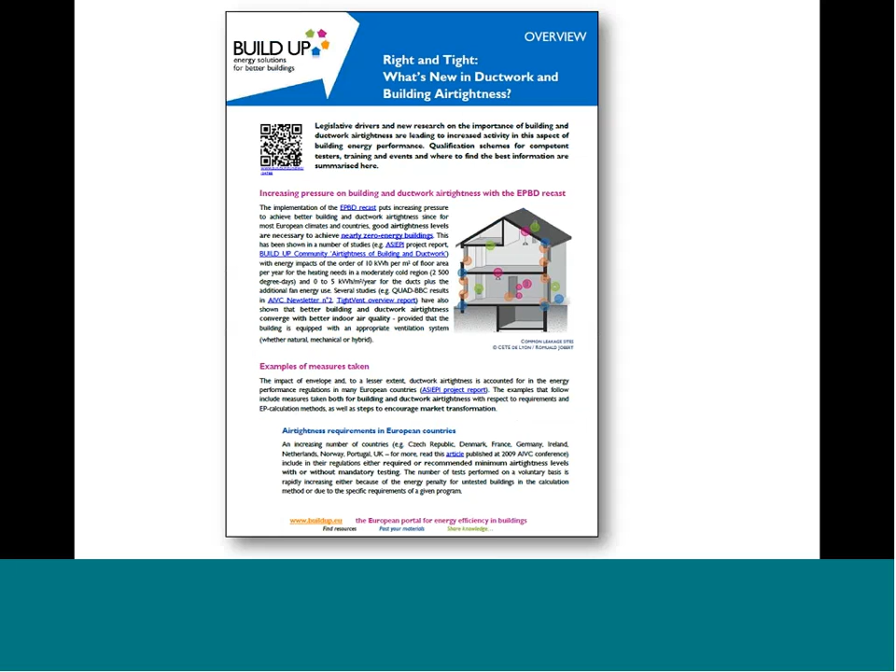And there is, of course, BUILD UP, mentioned previously by Garcia and Peter Wouters. In fact, my presentation and the one that Valérie Leprince will give in a few minutes are closely linked to the overview article which you can see on the screen now, and which you can download from the BUILD UP website.

So my presentation will be divided into a few sections. The first chapter will be about increasing pressure on building and ductwork airtightness with the EPBD recast. Then we'll talk about the requirements in EU countries, and about the incentives through calculation procedures and subsidies. And then we'll try to draw some conclusions and perspectives.

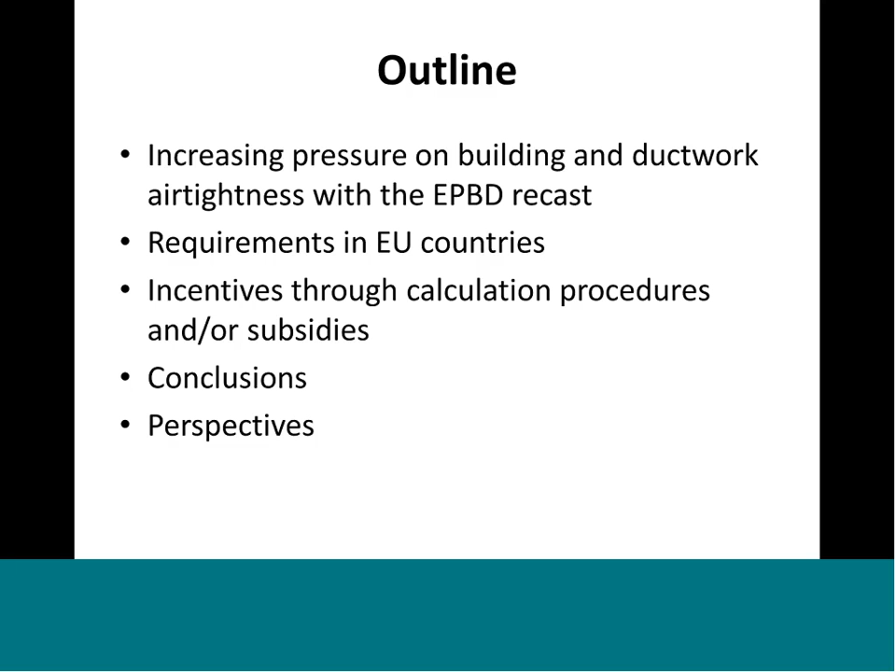So with regard to the pressure on building and ductwork airtightness with the EPBD recast, there are several sources that report an energy impact on the order of 10 kilowatt-hours per square meter per year of floor area for the heating needs in a moderately cold climate. That's for the envelope leakage, and about 0 to 5 kilowatt-hours per square meter per year for the ducts, plus the additional fan energy use. This has been reported in the past, and you can find some information about that in the ASIEPI reports, which have been funded by the Intelligent Energy Europe program.

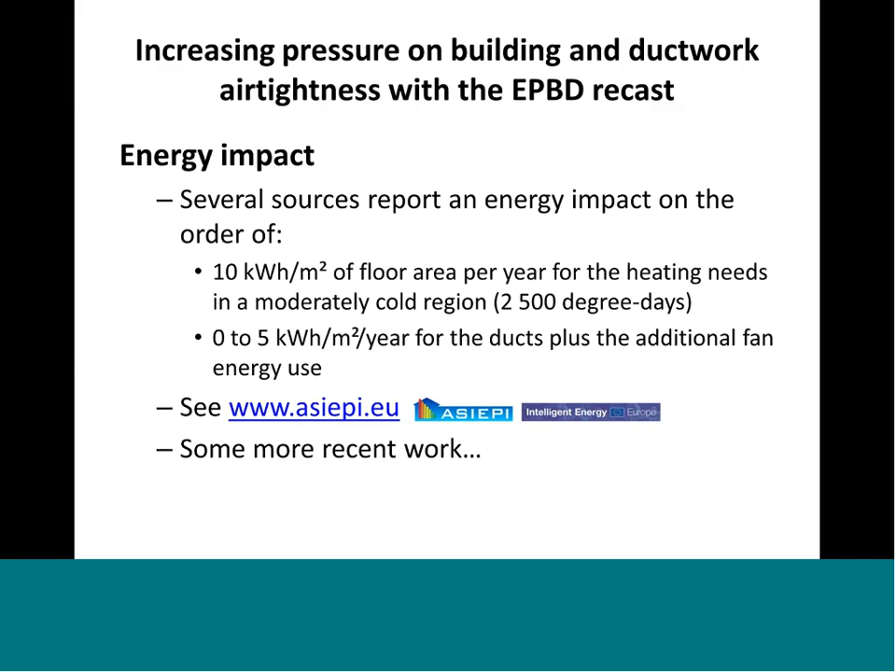But there's also some more recent work on these aspects, and I would like to focus on three studies which are more recent, which I thought were interesting to mention during this webinar. The first one is a study conducted in the UK, where they looked at two similar dwellings in two phases. In the first phase, the two dwellings had about the same leakage and tightness, and in the second phase, the airtightness of the second house has been improved significantly, as you can see here.

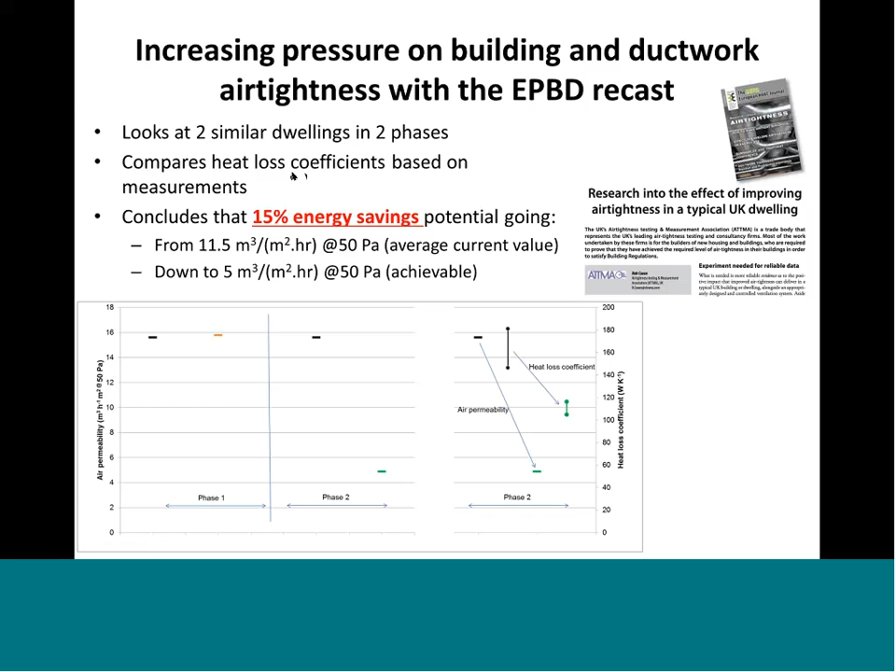They also measured the heat loss coefficient in the two phases, and showed that with the decrease of the air permeability, they also saw a significant decrease of the heat loss coefficient. I thought that was very interesting because this is based on experiments. Most of the time we have results on the impact of air permeability based on simulations, but in this case it's based on experiments, which I thought was quite interesting to mention. They conclude based on that that 15% energy savings are achievable in the UK building stock.

Second interesting study was conducted in Spain on office buildings in Madrid. I thought that was interesting to mention because we very often mention envelope and ductwork airtightness for cold climates or for mild climates, but it's also a concern for hot and mild climates. You can download that study from the REHVA website—it was a special issue of the REHVA journal in January 2013.

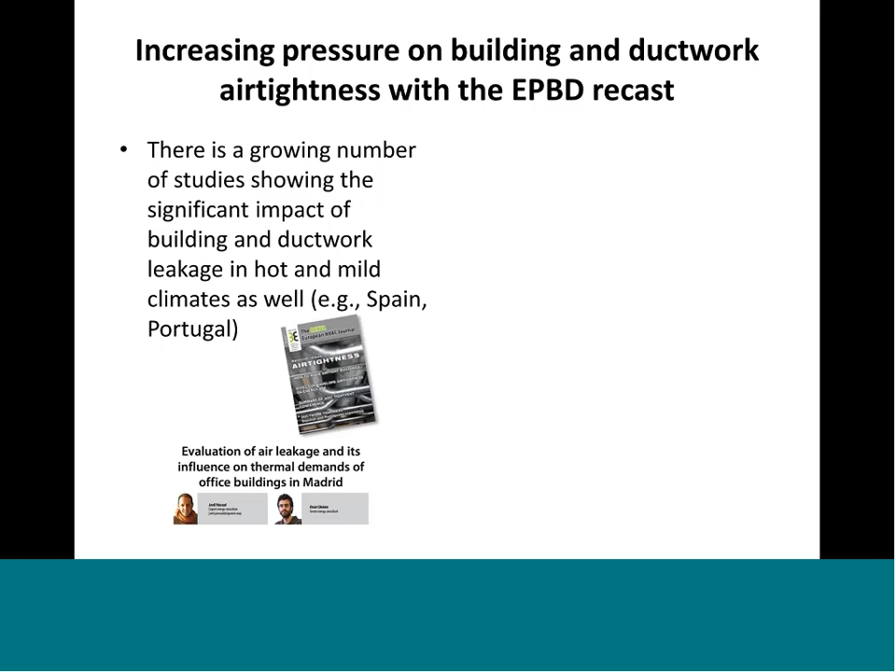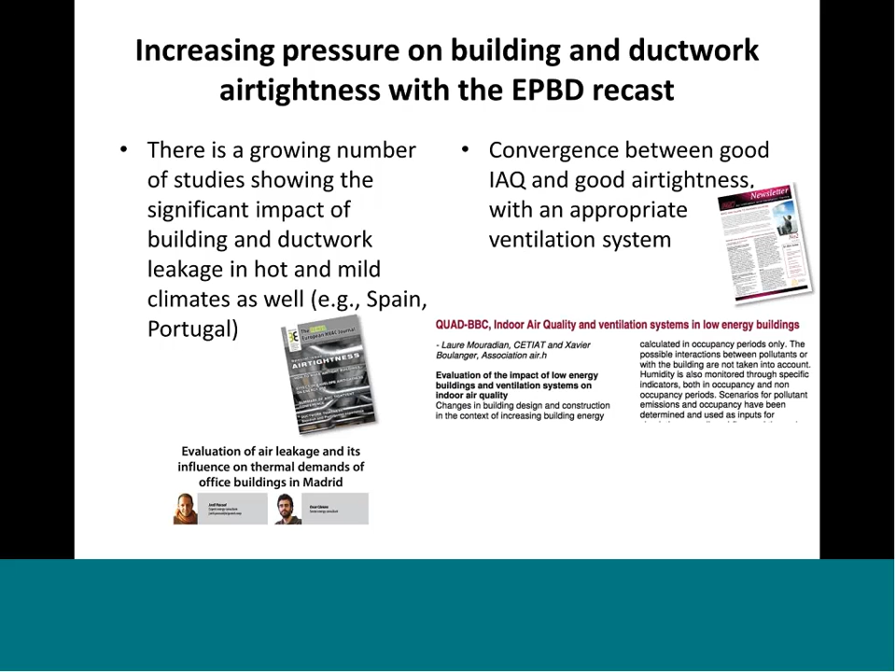Finally, there's a study conducted in France that showed a good convergence between indoor air quality and good envelope air tightness, provided of course that you have an appropriate ventilation system. You can find information about that in the AIVC newsletter. There was an article, I think in the second issue of the AIVC newsletter, showing that improving building air tightness was actually converging with better indoor air quality in the test cases they looked at.

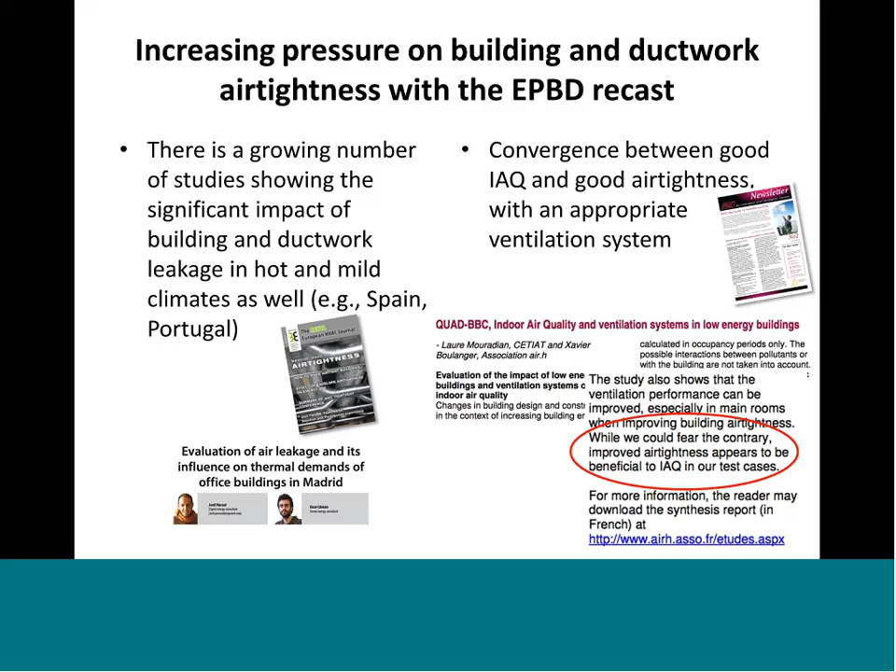So all of this shows that it's actually relevant to put pressure on building and ductwork air tightness in the context of the EPBD, because obviously it has a big impact on energy consumption. And of course, if you want to go to nearly zero energy buildings, you have to pay attention to these aspects.

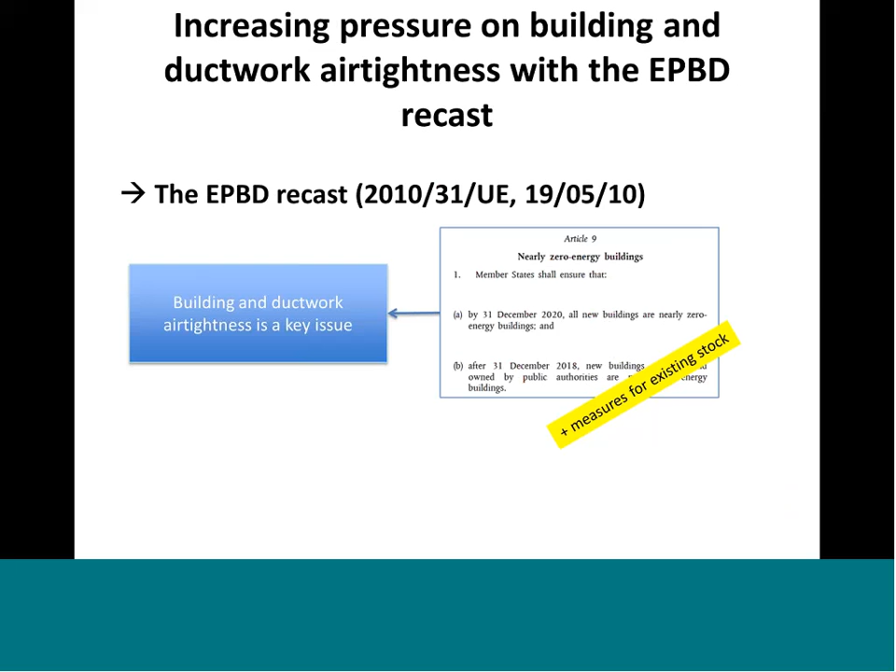Also, we see that in this context, requirements evolve. Although there is no explicit requirement for air tightness in the directive, what we see is that in fact most regulations include the impact of air tightness. Poor air tightness is often penalized in energy regulations in the member states, and in some countries there are even explicit minimum requirements.

You can find some information about that, again, in the ASIEPI project reports. But we've also performed a survey more recently, which is still ongoing, and with this we have more recent information about how the requirements evolve.

So here's a table with the various countries we've looked at. I'm not going to go through all the details of the regulations—of course it would take too much time. But I think it's interesting to see that there's a range of indicators, because you have Q50 in some cases, N50, W50 in some cases also in Denmark. You also have the airtightness indicator used at 4 pascals in France. So it's interesting to see there's a wide range of indicators used.

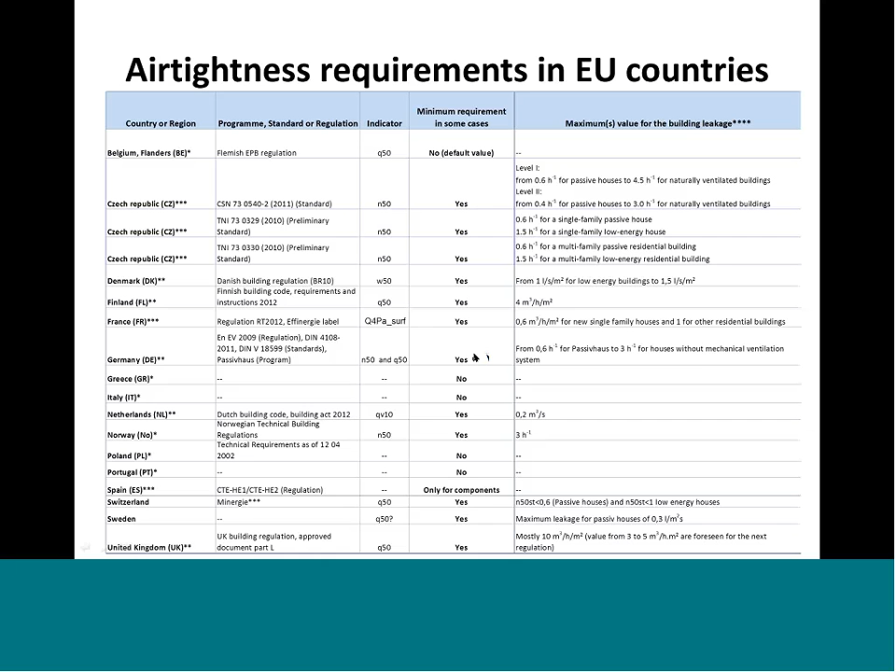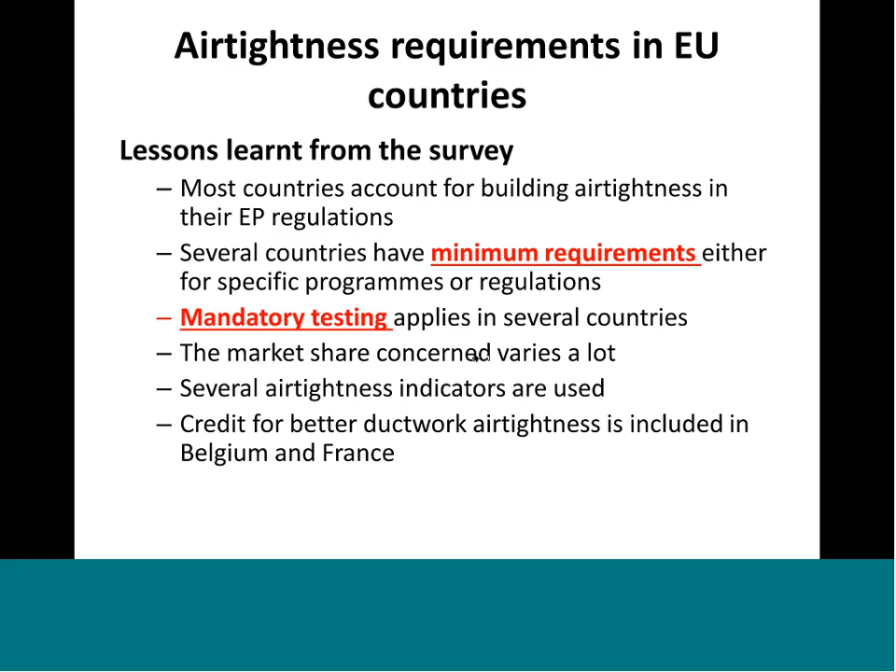So basically, what are the lessons learned from this survey? I think the first one is that most countries account for building airtightness in their EP regulation. Second, several countries have minimum requirements either for specific programs or for regulations. There is mandatory testing that applies in several countries. The market share varies a lot depending on whether it's for a specific program or for the whole regulation. There are also several airtightness indicators used, and finally we've seen there's credit for better airtightness and ductwork airtightness in Belgium and also in France.

With regard to mandatory testing, we've seen that it has come gradually into force in several countries. I think it's the UK which has the longest history, since they started in 2002 having mandatory requirements on testing building airtightness. It says that subjecting samples of newly built dwellings to a pressure test is compulsory.

In Portugal, there are also tests which are mandatory for HVAC systems in buildings larger than 1,000 square meters. In Denmark, there's also mandatory testing for no less than 5% of construction projects. In Ireland also, tests must be carried out in dwellings, but there are some rules that apply.

And finally in France, since 2013, airtightness has to be justified for all new residential buildings, either with a test or with an approved quality management approach. There's also a ductwork pressurization test which is mandatory in low-energy buildings.

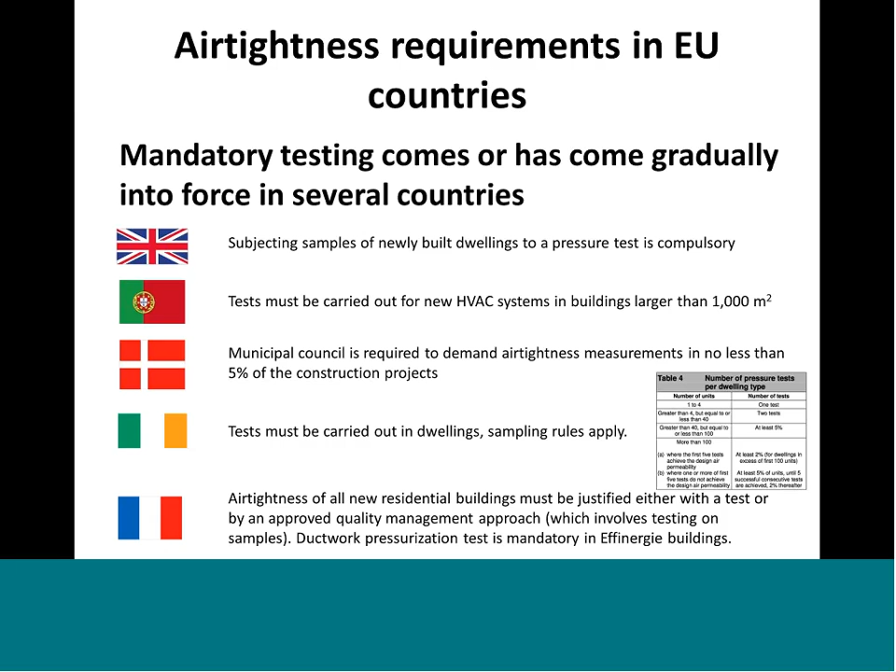So with regard to incentives to promote better airtightness, there have been incentives in the calculations and also in subsidies. As we can see, most energy regulation includes the impact of building airtightness on the overall energy performance calculation. We've seen that in the ASIEPI report, and this was confirmed more recently with our survey, and most of the time it's done with a default value.

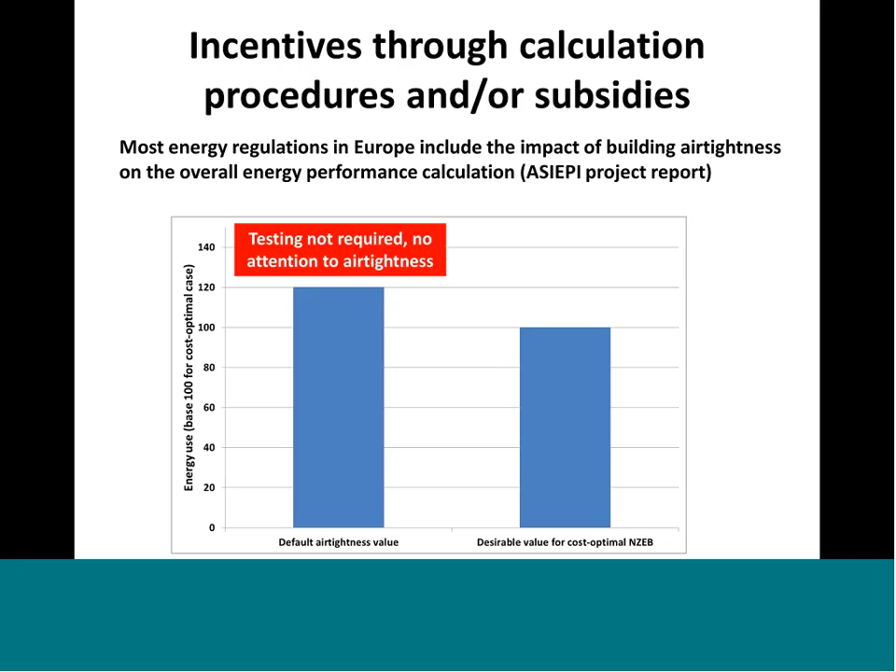Where testing is not required, in that case you have no attention to airtightness in general. But in the case you would like to have better airtightness, which would be relevant because it's cost efficient, then you have a substantial decrease in the foreseen energy use of the building.

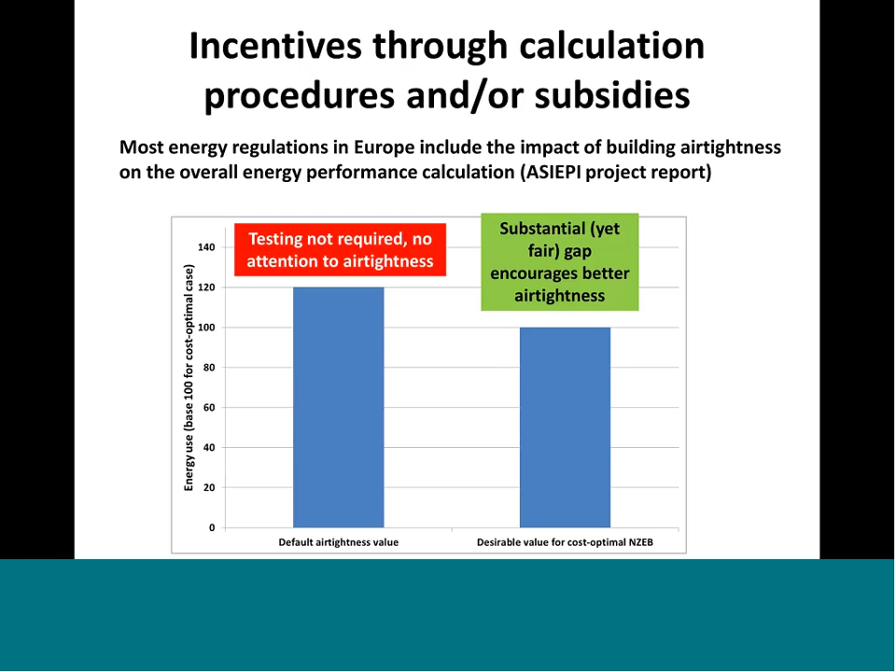There are also incentives through calculation procedures, through quality management approaches in France. In that case, it allows non-systematic testing. So basically, instead of testing all buildings, if you build 5,000 houses a year, you can test only maybe 10% of the houses in order to justify that you've taken care of airtightness correctly. Initially it was controversial, because some people thought it was unfair since not all buildings had to be tested, but in fact we see that it's more or less positive as of today, with positive feedback, although some improvements are always possible.

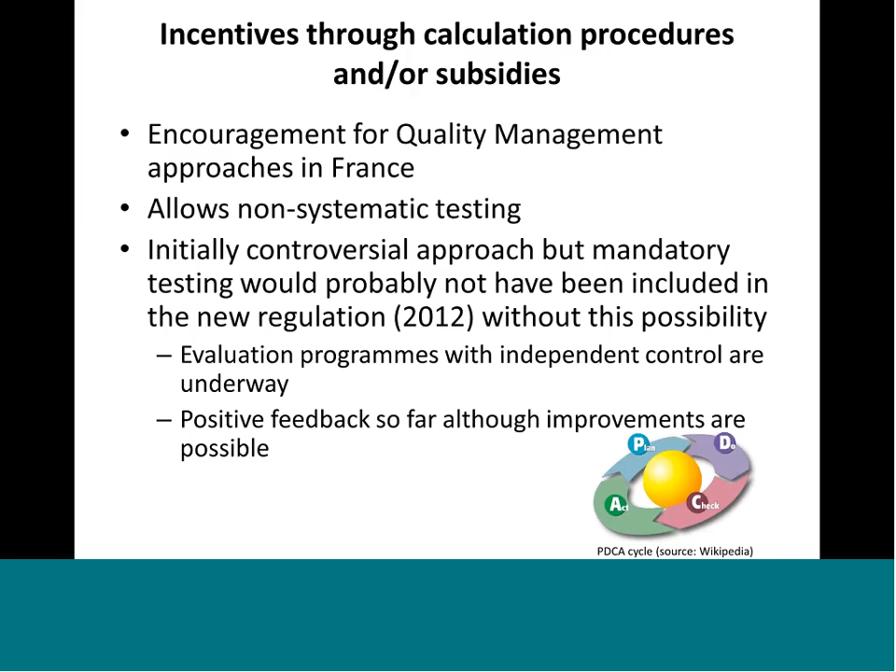It has also been an essential element to allow a minimum airtightness requirement in the new regulation in France.

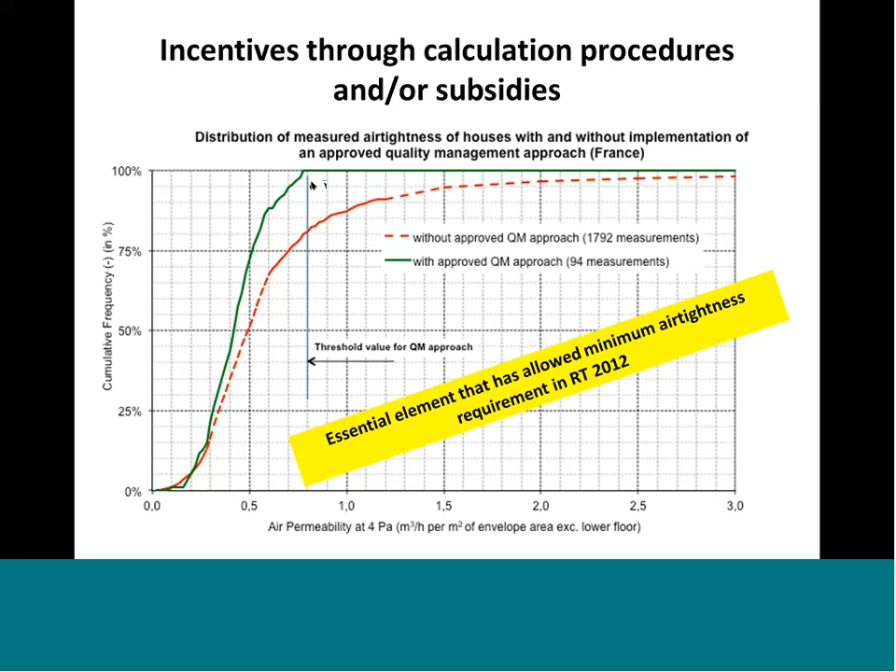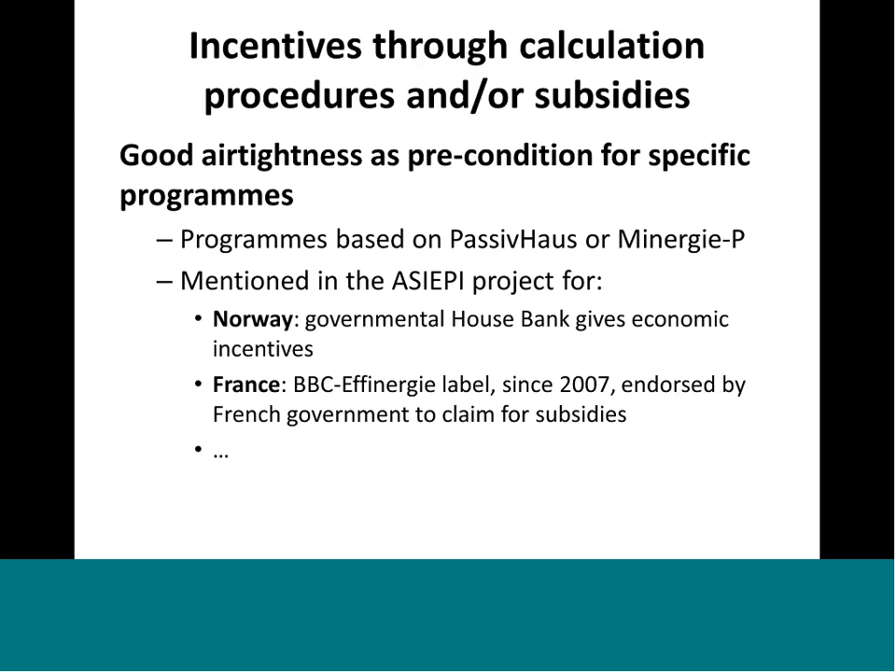Good airtightness is sometimes used as a precondition for specific programs, which is a big incentive for practitioners. For instance, if you apply for programs based on passive house or Minergie-P standards, you have to do an airtightness test and justify that your building has good airtightness. As mentioned in the ASIEPI project report, Norway's governmental house bank gives economic incentives for good airtightness, and in France the BBC-Effinergie label since 2007 is endorsed by the French government to claim for subsidies.

Now there are some questions raised. We see that requirements evolve, but does the market react positively to these changes? Does it improve the quality of buildings in practice? And how do we set up effective control frameworks to avoid wrong declarations, whether intentional or not, in the EP calculations?

Having a mandatory test is interesting, but if there's no control on this test, it's not necessarily a good thing, because with wrong declarations, you don't have a guarantee that the building will actually meet the required performance.

As a summary, recent studies and developments confirm the relevance of improving building and ductwork airtightness in the EPBD recast context. We've seen through experiments that energy consumption can be significantly reduced with better airtightness, with simulations also, and convergence between better indoor air quality and better airtightness, so that goes in the same direction.

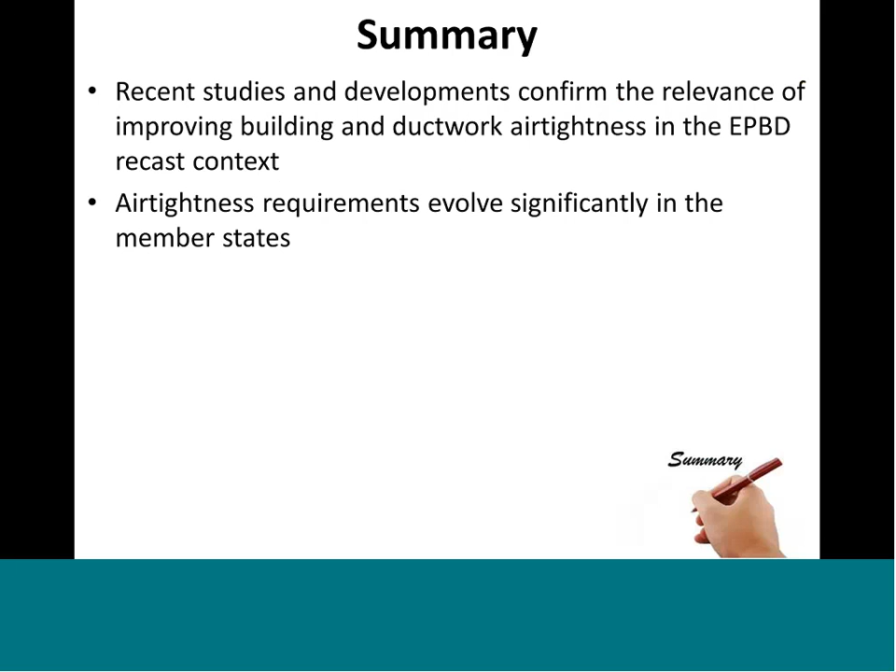We've seen that airtightness requirements evolve significantly in member states, with more and more countries explicitly requiring airtightness testing for specific programs or for a wide range of buildings, such as the mandatory testing imposed in France, the UK, and Denmark, at least for some part of the building stock.

Finally, these changes raise a number of questions, including how to efficiently control compliance with regard to airtightness. The presentation of Valérie Leprince will give more information about this aspect—in other words, how to make sure that when you check a building's compliance with regard to airtightness, you have good confidence that the result is actually reliable.